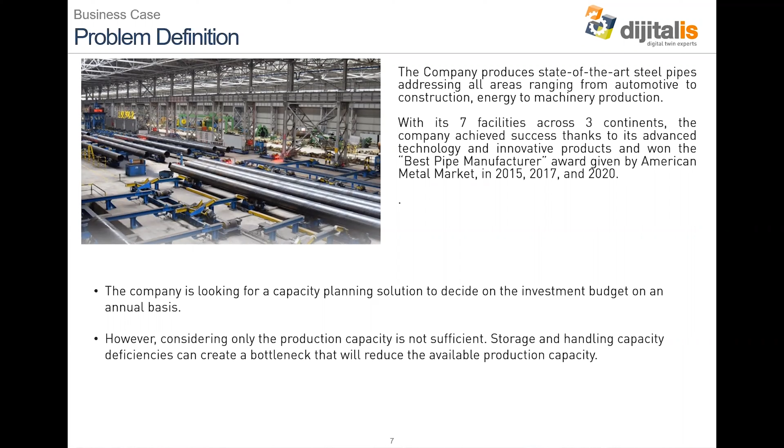The company is looking for a capacity planning solution to decide on the investment budget on an annual basis. However, considering only the production capacity for this industry was not sufficient. In addition to the production capacity, storage and handling processes should also be considered, because any deficiency in that kind of capacity would create a bottleneck that will eventually reduce the production capacity which is available normally.

So to give you a better idea of the complex situation in that company, first of all, the product portfolio diversity was large, and the factory was producing in batches. And the process constraints, when added to that complexity, generate a considerable amount of work in progress inventory. And that inventory was stored on top of each other as a pile in the factory floor. And since the limited storage area in the facility, sometimes they need to move the pipes to a faraway location. And as well as the storage zone problems, the piling also generates an additional situation, because the piling and depiling of the pipes requires a lot of crane activity.

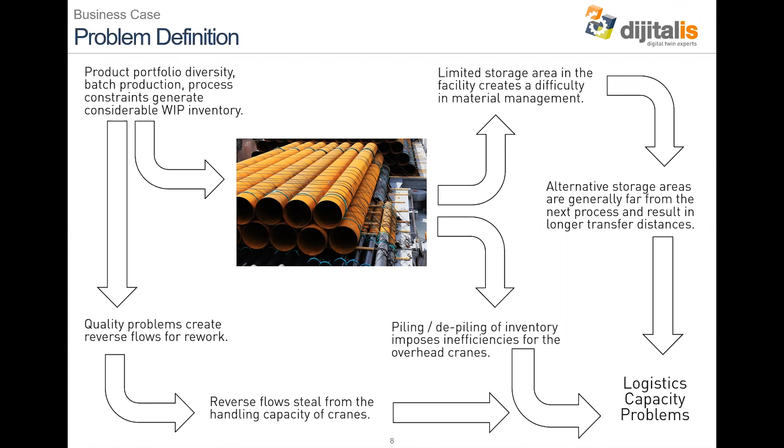Also, on top of the normal production process, quality problems downstream would create reverse flows for rework, and then the produced pipes will be again handled by the cranes and taken back to the upstream processes. So to sum it up, both the reverse flows and the piling and depiling operations require crane capacity, and storing in faraway zones would increase the transfer distances, and these all result in logistics capacity problems.

Therefore, the production goals are tackled by two different capacity constraints: production and logistics. Therefore, an integrated approach to the production and logistics capacity was required, and the solution was building a digital twin of the factory. During our study, the simulation model shows the intensity of the situation, that the crane productivity is very much dependent on the inventory level of pipes.

So you see that actually, if you have only one level of pipes on the storage area, the picking time by the cranes is relatively short. But if you place two levels of pipes in the storage zone, then a slight piling and depiling operation happens, and the average picking time for the pipes is doubled. And as you are producing in batch production, and because of the process constraints, sometimes the inventory builds up, and with the limited storage zone, the company needs to have 3 levels of pipes. And this again increases the picking time per pipe to even higher levels.

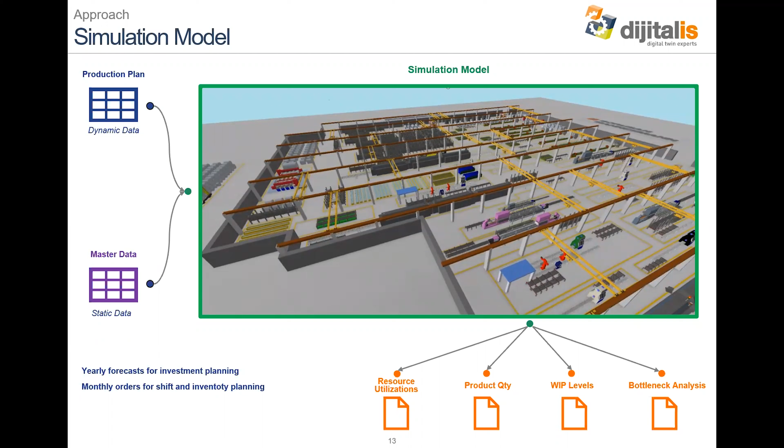So the approach was to build a simulation model with all the production and logistics rules and constraints. So this model was used in two different ways. One is that we imported the yearly forecasts so that the company can run a whole year of simulation to understand where the bottlenecks are and what should be the investment budget to remove those bottlenecks, or a more short-term analysis for the monthly orders to decide on the shift and inventory planning rules.

Here I would like to show a video of the simulation model, and to give you a better understanding of the efficiency of the simulation modeling, you could see that in this model, 12 months of production simulation based on forecasted orders only takes 15 minutes to run. So for a few minutes, I would like to leave you alone to enjoy the simulation video.

Here, the simulation model runs 12 months of production orders. As you can see, the raw materials are moved to the first processes, and then the semi-finished goods are moved by the cranes or forklifts to the storage zones. And likewise, the semi-finished goods are moved from one process to the other until they are stored in the final storage zone.

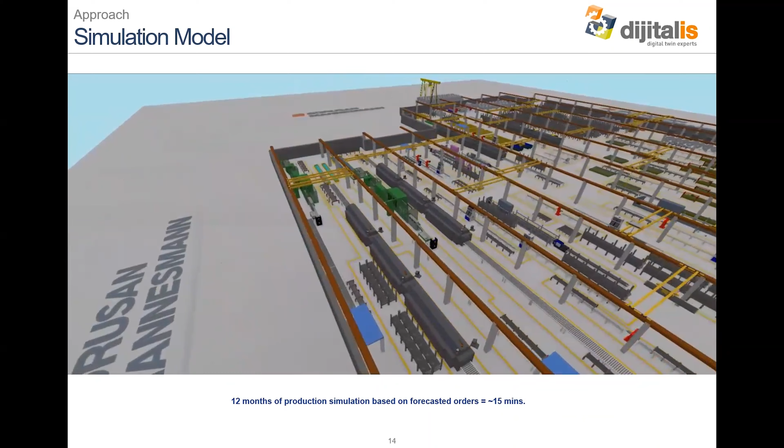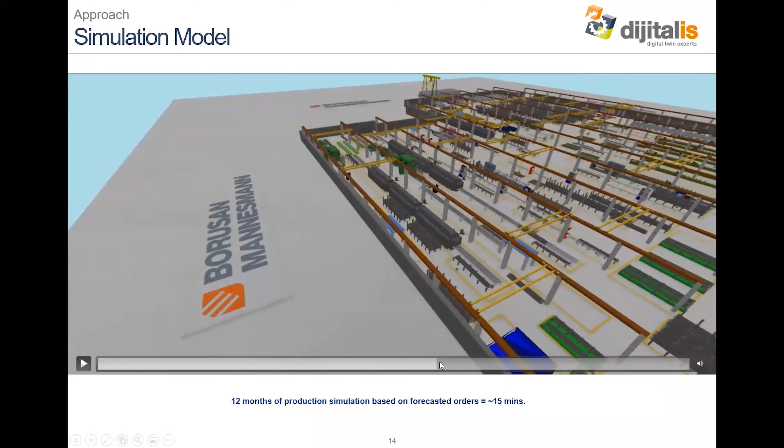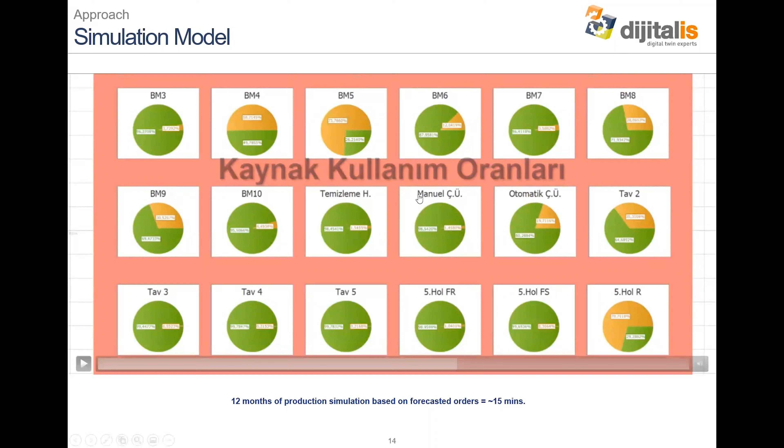And by running these 12 months of forecasted orders, the company could see the utilization of all the machines in the factory and see which one is going to pose problems for the production and which resources will be bottlenecks, so that the company could understand where to invest and how much.

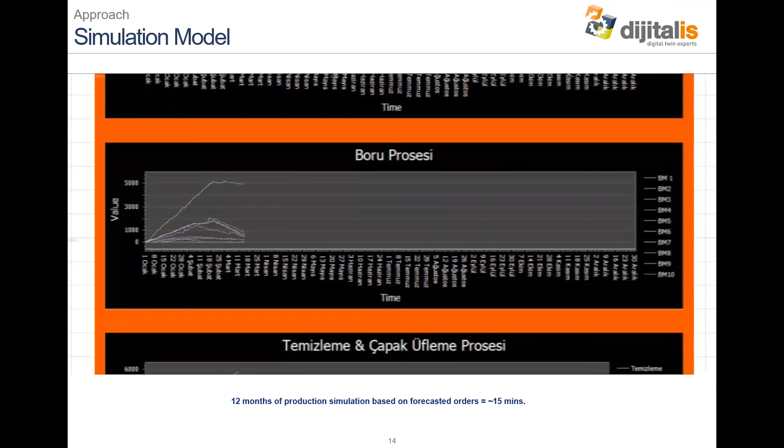And here, more importantly, you could see the inventory buildup in different storage locations with a breakdown of different product groups. As you can see, the timeline goes from the 1st of January until the end of the year. So day by day, it is visible at what time the storage zone capacities will be exceeded, and then the cranes or the forklifts will start to move the pipes to other regions, which are less favorable because of the distances.

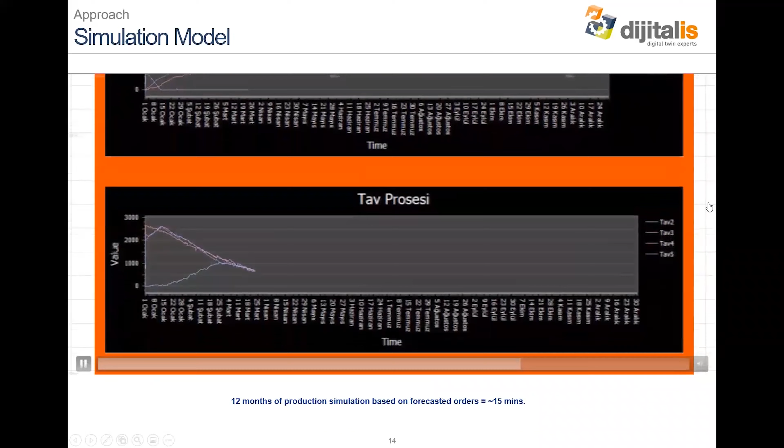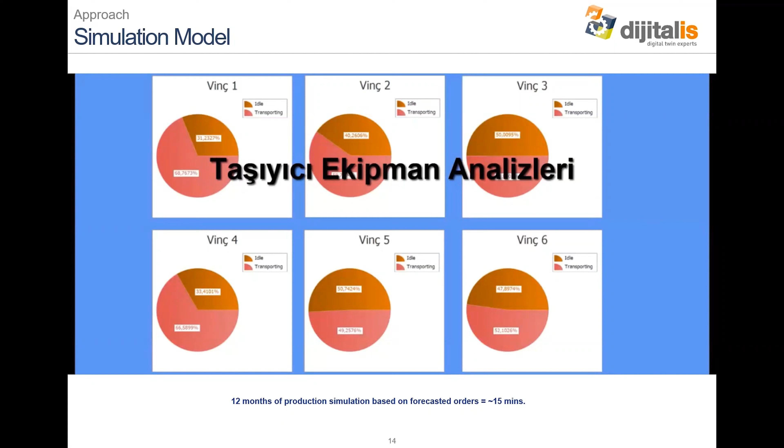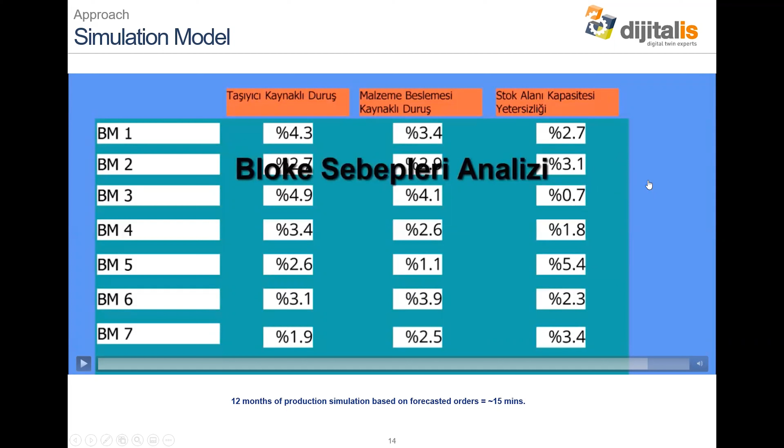It is also important to measure the utilization of the overhead cranes to see if any of the cranes will be a bottleneck throughout the year. Another important measurement from the simulation is showing the 7 main production lines, and it tells the capacity loss due to the factory logistic reasons. So we are measuring here what will be the capacity loss due to the overhead crane bottlenecks or the storage location capacity bottlenecks.

And finally, here we see what will be the annual production of this factory and how it compares with the forecasted orders. So let's review the results in more detail. As I mentioned, from the simulation, we could see the utilization of all the production resources and the activities, such as the idle time and what other activities the resources are used for.

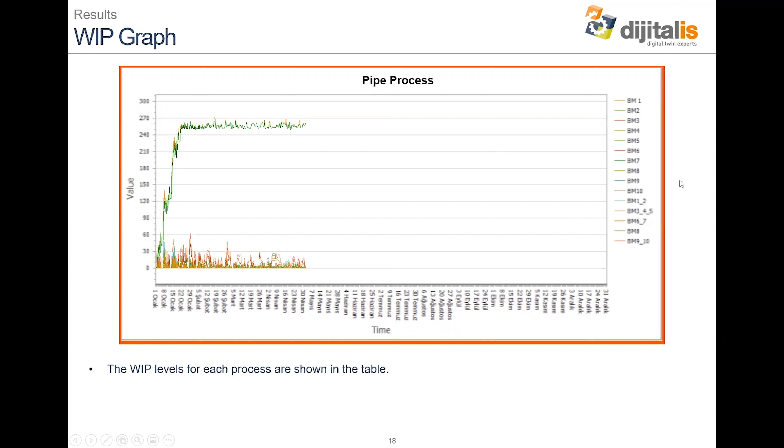Again, we are able to see what will be the utilization of the material handling equipment, such as the overhead cranes and the other transportation equipment. Here, again, we could see the storage zone utilization and how much inventory is building up where and from which semi-finished good. And here we have the general results showing what should be our expected production capacity under this investment level.

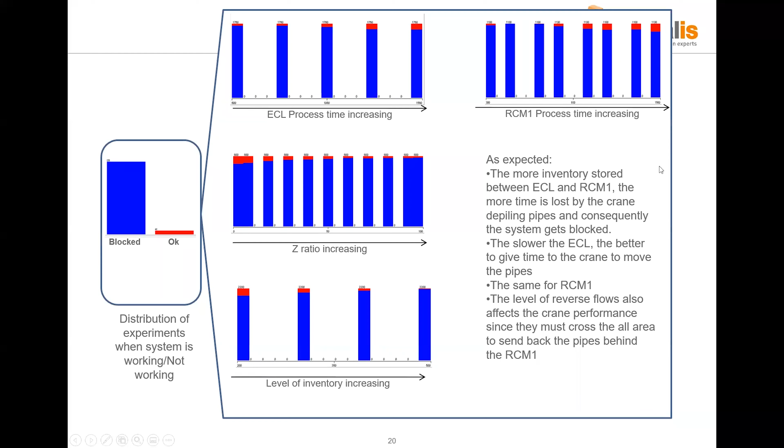Of course, by running these simulations, we were also able to show better rules to manage the production. By running extensive simulation experiments, we were able to show what should be the optimum inventory level in certain storage locations so that the bottleneck is not the overhead crane.

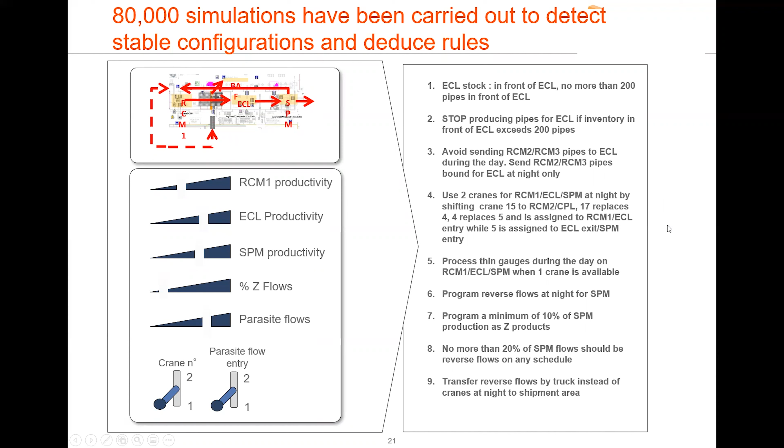And here you see combined improvement ideas for this factory, showing what should be the total number of pipes stored in certain locations, what should be the number of cranes working in a certain hall, and when we should program our reverse flows so that they don't cannibalize the regular production flows. So these are also important rules that we were able to optimize thanks to the simulation, so that the company can implement these rules to better run the production.